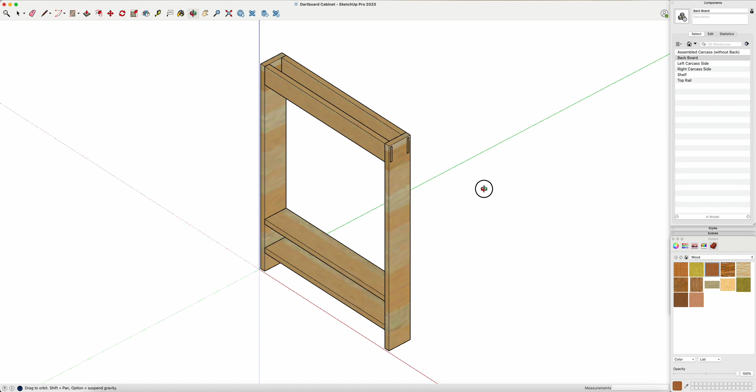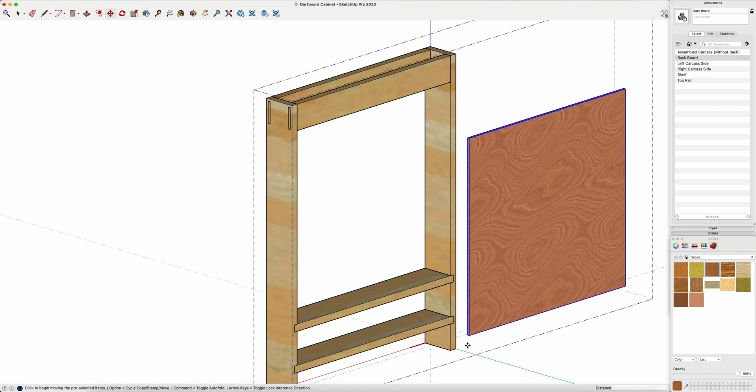I'm going to also now be editing this component. So double click to get into edit mode and you'll see I've got the dotted lines around the component indicating that we're in edit mode. And then I'm going to bring a backboard into the model. I'll start with getting the corner here and moving it to this corner right here so that they're touching.

And I've got a large overlap on the right side and a large overlap on the bottom. What I need to do is to shift that so that it's evenly overlapped the whole way around. Now you might remember we used a 5mm offset. So in order to get this to fit, we're going to use the move tool and we're going to click on the corner over here, click. We're going to drag over so we've got the red dotted line showing.

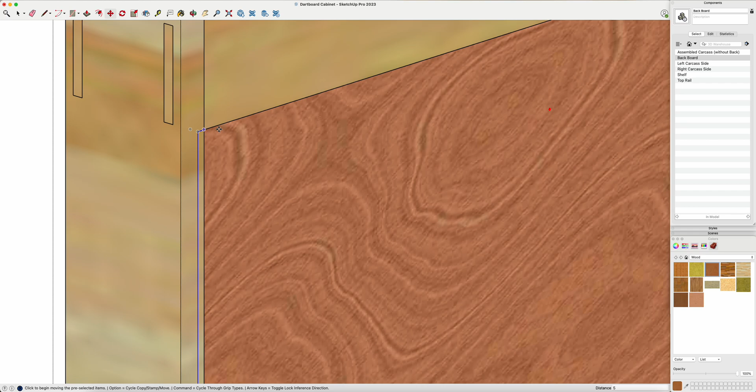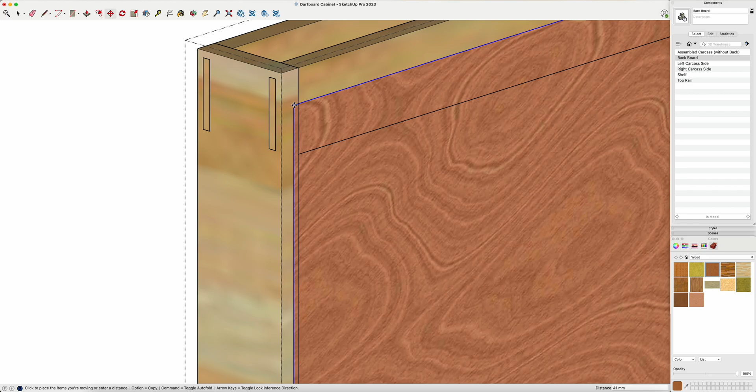And instead of just clicking and letting go, I'm going to type in 5 and press enter so it moves to the left 5mm. And now I actually have an even amount of overlap on the left and on the right. I'm going to do the same process again, clicking on the corner. I'm going to drag upwards until I see that blue dotted line starting to show. Okay, so see I've got the blue dotted line there. So blue dotted lines, I'm on the right axis. And again, 5 and enter. And again, that gives me a nice even top and bottom overlap.

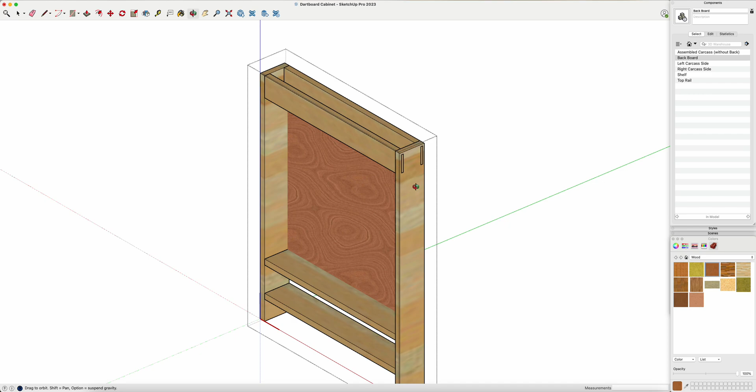Now, in one sense, this is good because it's going to give me the right dimensions of things, but it's not an accurate representation of my model because in timber, you don't have two pieces of timber overlapping each other. It's not possible. You have to cut them out so that they fit together neatly. And in SketchUp, we have a tool in the solid tools menu called trim that enables us to get these to fit properly. So we're going to go to tools menu, solid tools, trim.

I'm going to click on the backboard first, and then I'm going to click on this rail. And you might have seen the little change that happened there. I'll just Command Z and you can pay attention. See that I've got two lines there at the moment indicating an overlap. So tools, solid tools, trim, click on the back, then click on the rail. Watch how these lines change because there's no longer an overlap. It's actually trimmed the rail to fit the back piece.

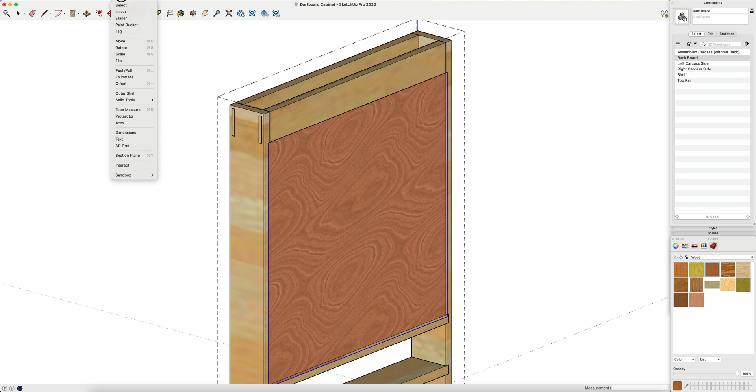I'm going to repeat that process. Solid tools, trim, click the back, click the side, and it's trimmed that. Solid tools, trim, click the back, click the other side. Tools, solid tools, trim, click the back, click the shelf, and that's now trimmed.

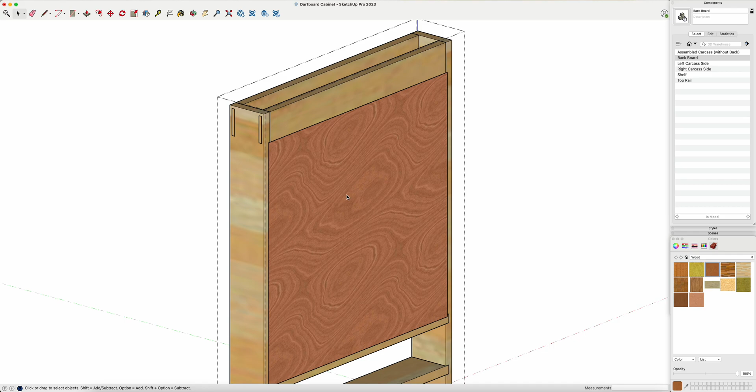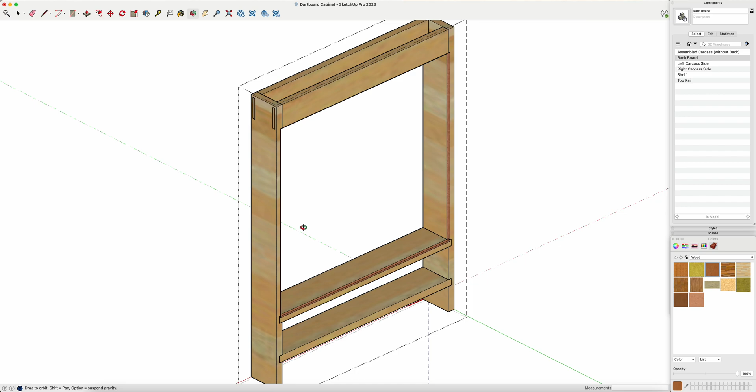Now, to show you how that's actually worked, if I was to, in the edit mode, delete the backboard, you'll now see that I've got this fancy little groove sitting the whole way around my project. And the reason I've got that is because it's trimmed out and replicated the exact same process that would happen if I had a router to cut that out. So I'll put that back to where it's meant to be.

Go back to my front view, now my isometric view, and I now have an assembled component that's got the back, the sides, the rail, and the shelves ready to go. That also means I can edit the name of this component. So see, we've named it assembled carcass without back in the components window. Once you click on it, you can then go up to the name, you can edit the name and press enter, and it renames it permanently in your model.

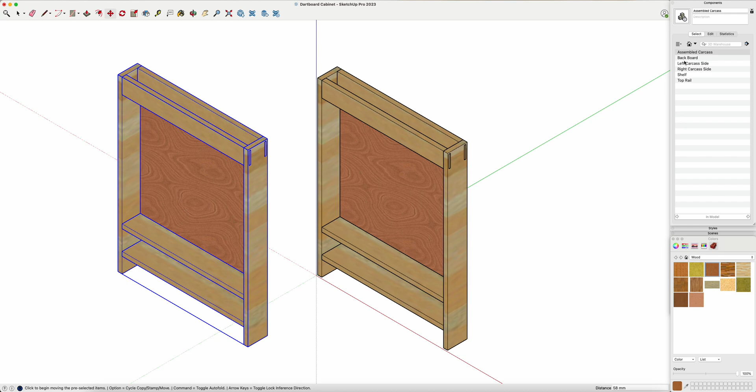And again, this means that you can click and drag as many of these into your model as you need by dragging them in from your components window. Okay. So that video was a nice short one. A couple technical steps there in terms of the trim tool and editing components.